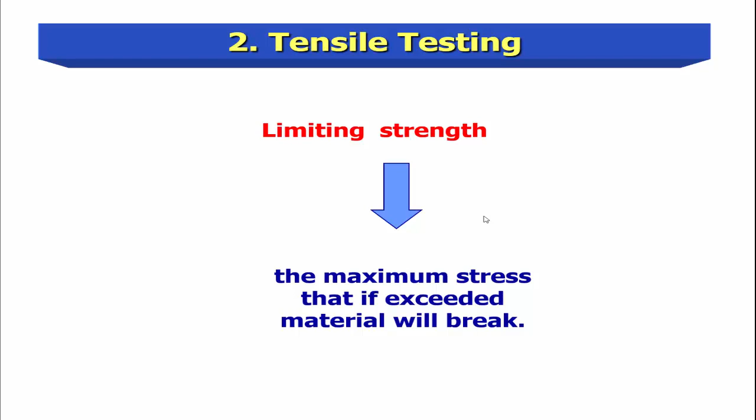So here are some questions that you need to keep in mind. For example, what is the tensile testing? What is it used for? How does it work? And the important parts of a tensile tester. So we have the specimens, the pulling and pushing mechanism. We have the grips, the extensometer, and the fixtures.

Also, we have some types of loading, the definition of elastic modulus, the yield strength, the tensile strength, and how to determine percent elongation and the true stress and strain, and finally the Poisson's ratio.

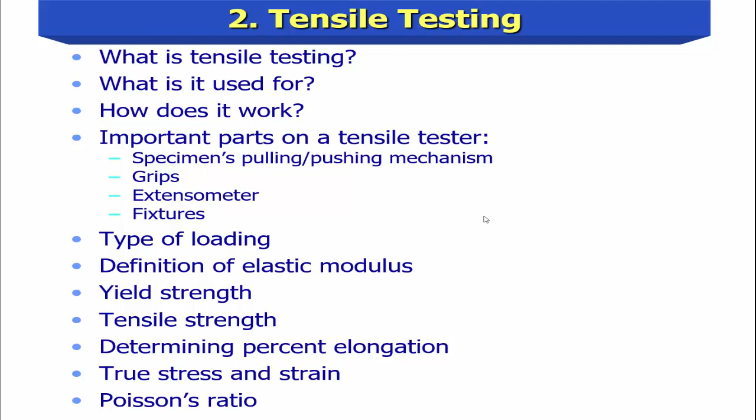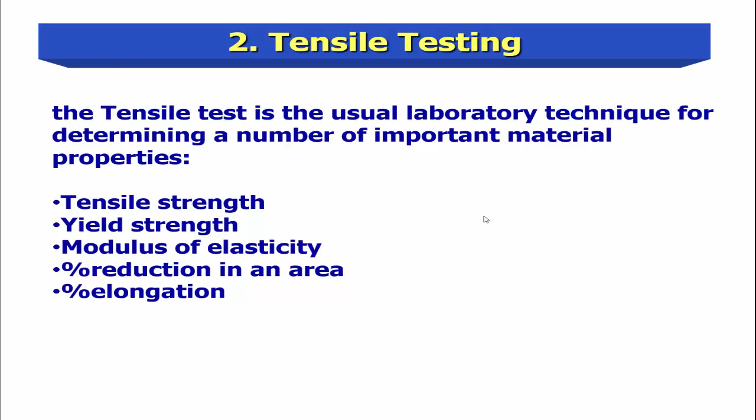So the tensile test is the usual laboratory technique for determining a number of important material properties like the tensile strength, the yield strength, the modulus of elasticity, the percentage of reduction in area, and the percentage of elongation. So here are some examples of tensile testers.

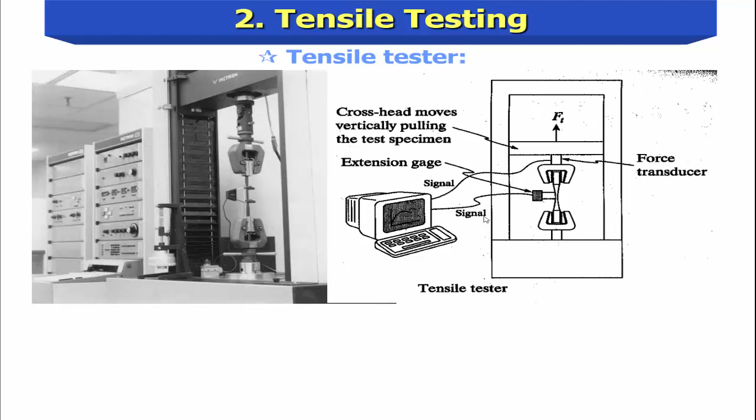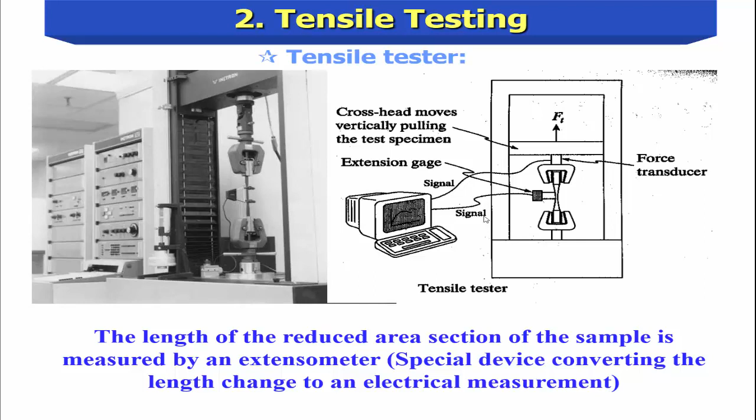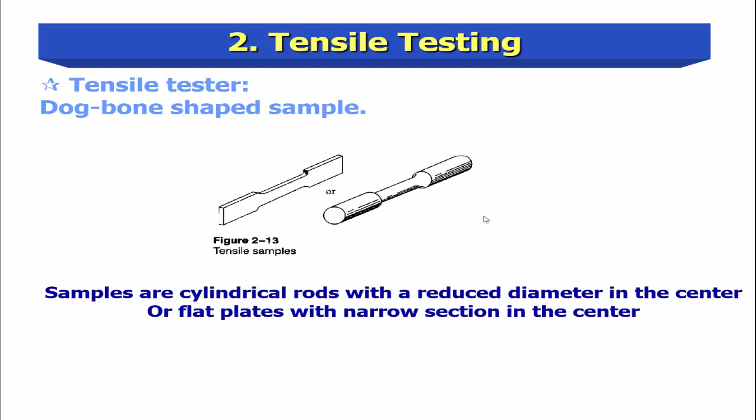Basically, the length of the reduced area section of the sample is measured by an extensometer, and it's a special device converting the length change to an electrical measurement. So the tensile tester uses a dog bone shaped sample, and basically samples are cylindrical rods with reduced diameter in the center, or flat plates with a narrow section in the center.

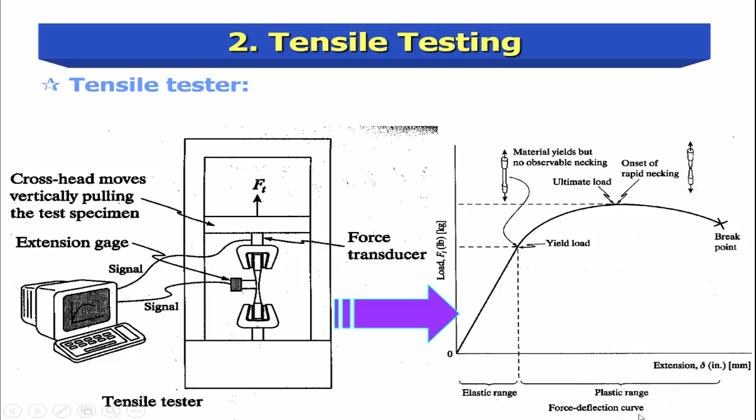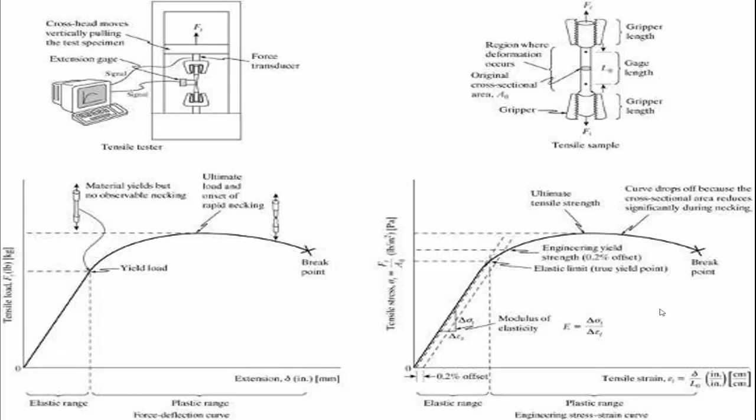And this is another example. We have here the tensile tester and here the force deflection curve. This is another example. So basically the load is measured by the stress, the extension is the strain, and here is the stress strain curve or diagram.

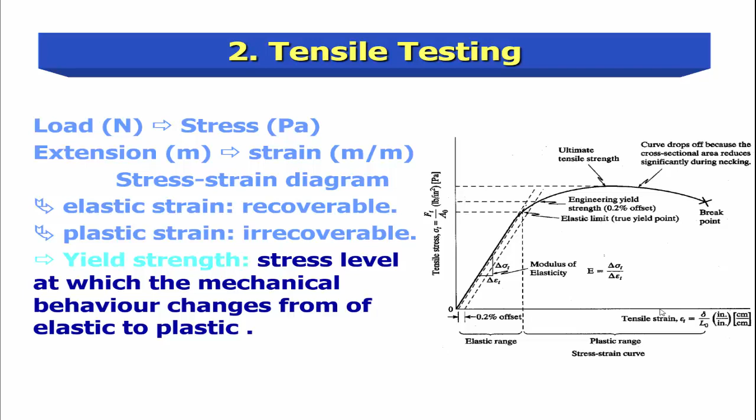So also the elastic strain is recoverable and the plastic strain is not recoverable. The yield strength is the stress level at which the mechanical behavior changes from elastic to plastic. And once the sample fractures, two measurements are made: the length of the final gauge area and the final diameter of the necked down portion of the sample.

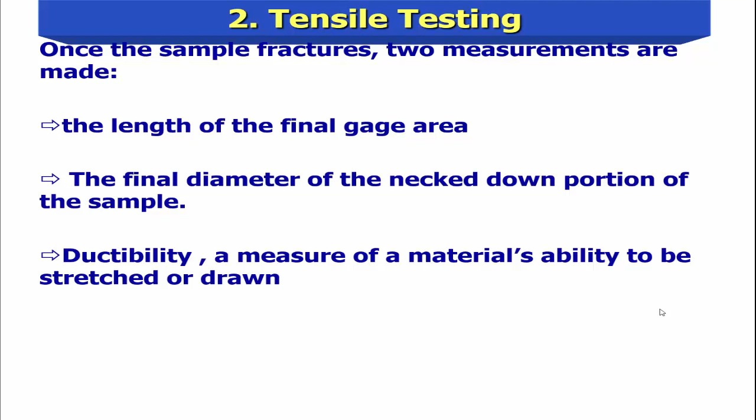For the ductility, it's a measure of a material's ability to be stretched or drawn. So its general strength characteristics, and the modulus of elasticity is the measure of the rigidity or stiffness, and basically the elasticity is the delta stress over the delta strain, and ductility and toughness is the percent elongation and the percent area reduction.

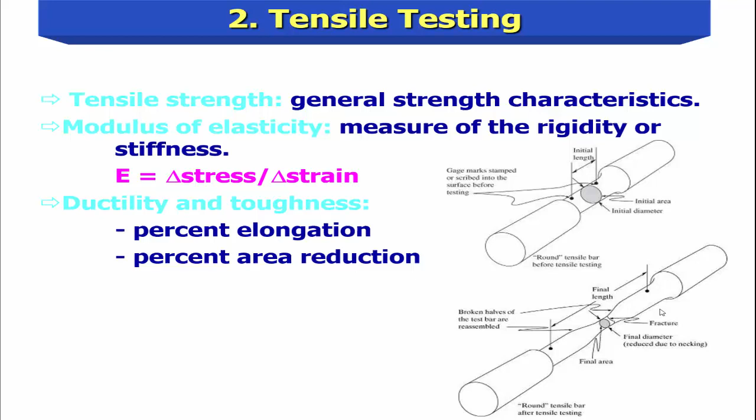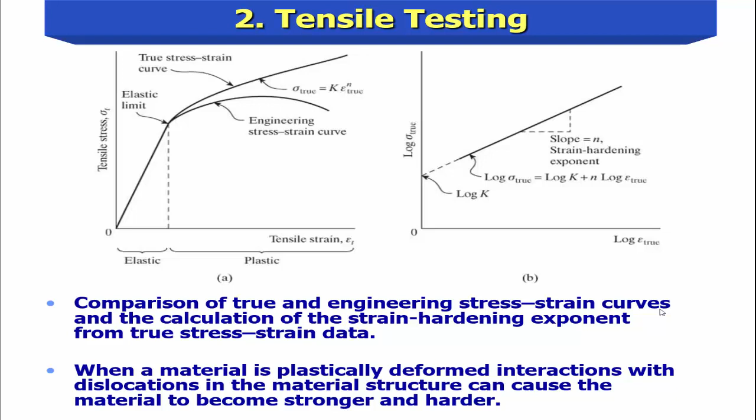So we have here two examples, the comparison of true and engineering stress strain curves and the calculation of the strain hardening exponent from true stress strain data. And when a material is plastically deformed, interactions with dislocations in the material structure can cause the material to become stronger and harder. We have here the Poisson's ratio. And it's a demonstration.

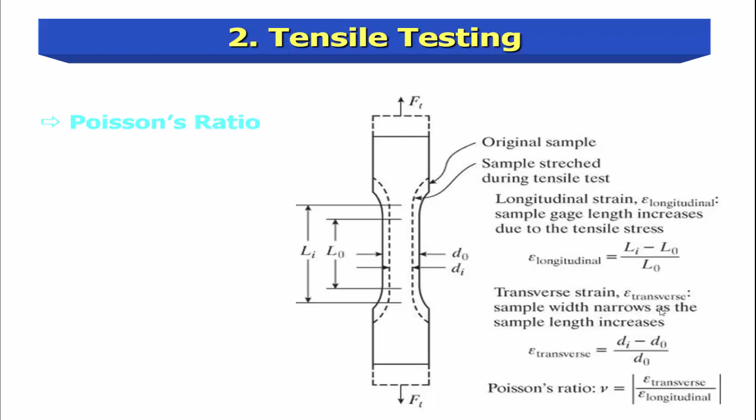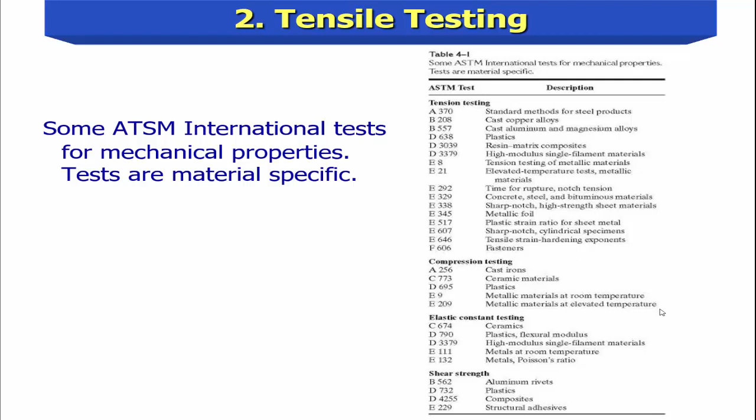So some ASTM international tests for mechanical properties are here in the table, and by the way, the tests are material specific. So now let's recapitulate the significance of stress strain data. So basically it's all about standard tests, properties that can be measured, measuring resilience, measuring toughness, measuring shear stress, and shear modulus.